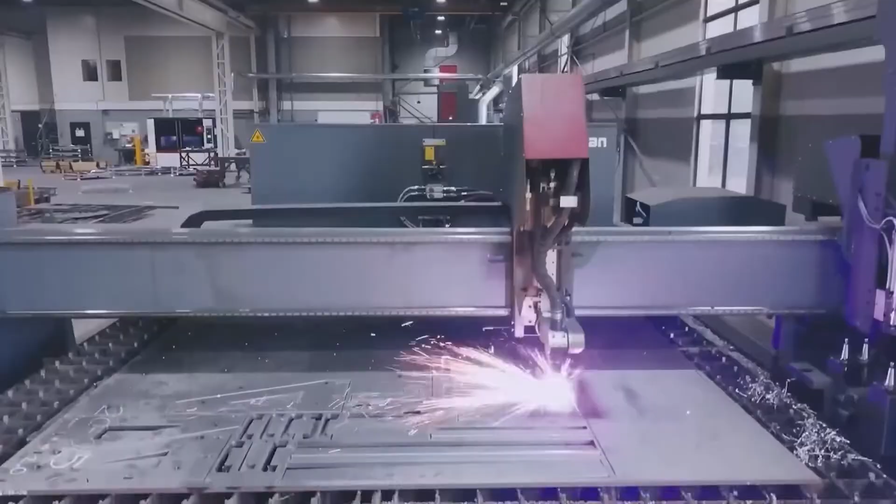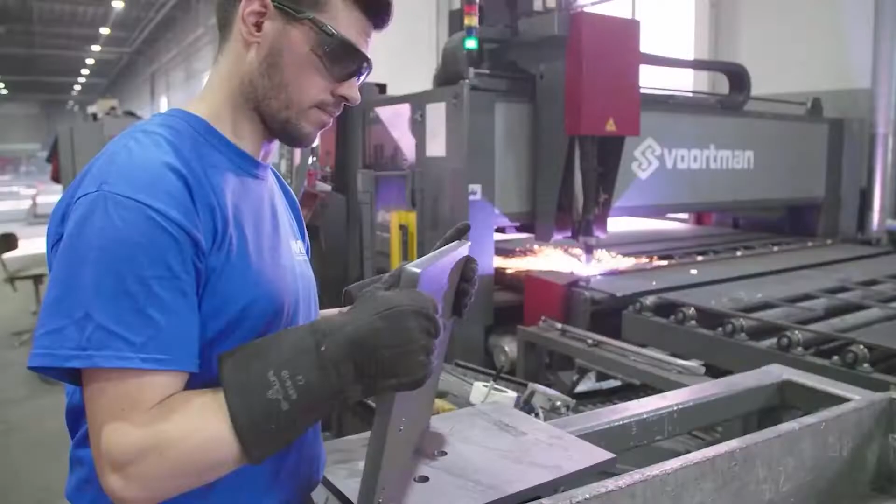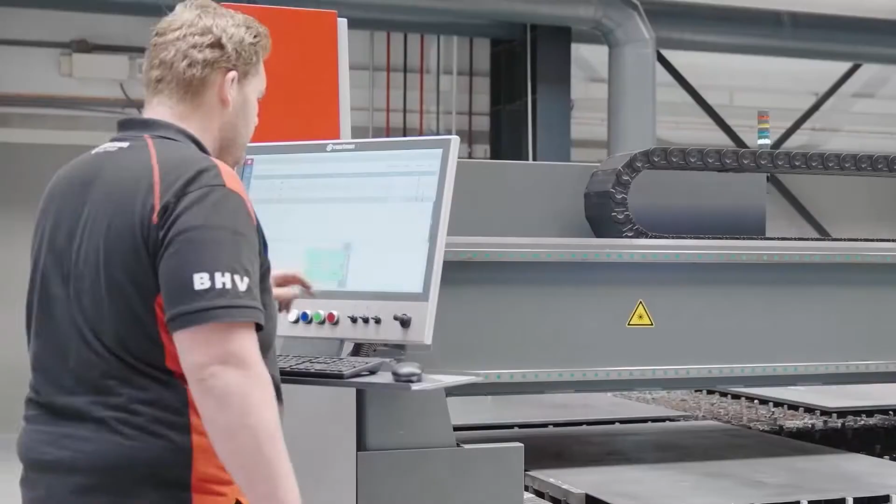Joey, can you shortly introduce Voortman? Olga, thanks for the introduction. Yes, I can. So you already explained we produce beam processing systems and plate processing systems. We are a manufacturer of steel processing systems in general. We focus today on thermal cutting, and with thermal cutting we cut angles, but also H-beams, but also plates and tubes as well. And we do that for a variety of industries. So we supply to steel fabrication, which we see in the video, but we also supply to steel service centers, general manufacturing, pressure vessel manufacturing, windmill manufacturing and even shipbuilding. So quite a wide variety of industries.

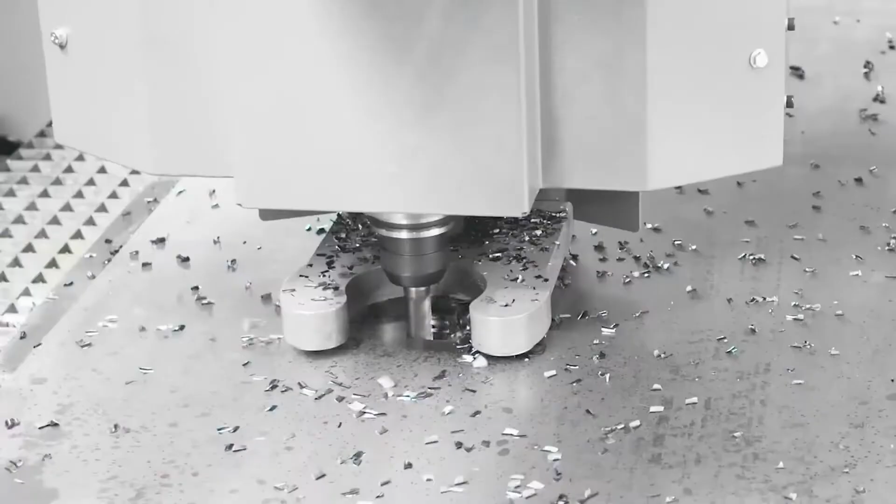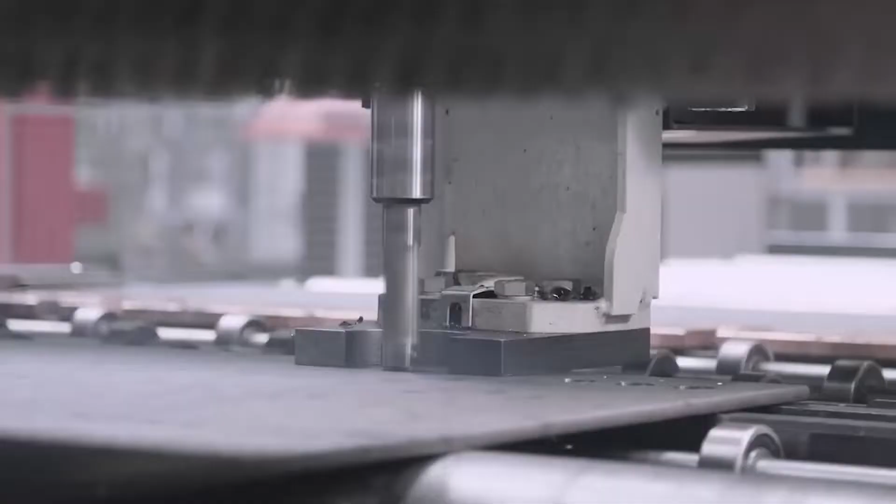We have today, I think, quite an international audience. Yeah. And we are also quite an international organization because we are here in our headquarters, like you mentioned, but we also have subsidiaries in the United States, in Southeast Asia, and in the entire western part of Europe we have various subsidiaries. So quite an international organization with an extensive product portfolio for a variety of markets.

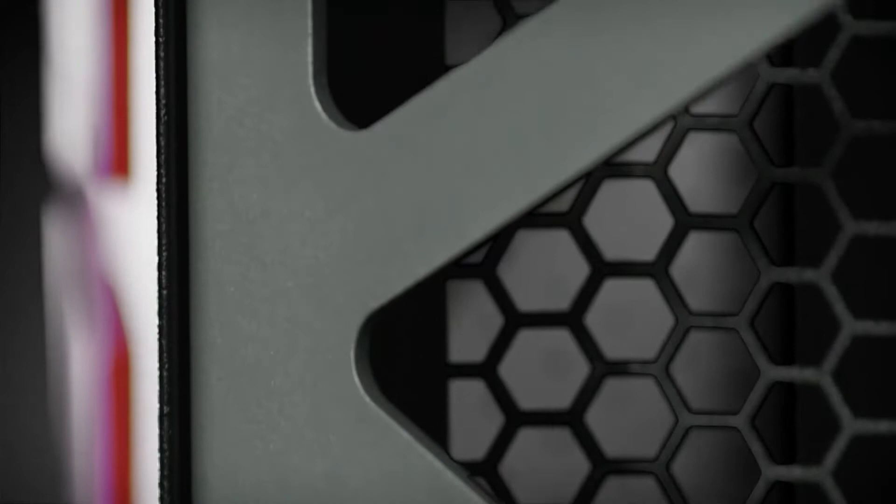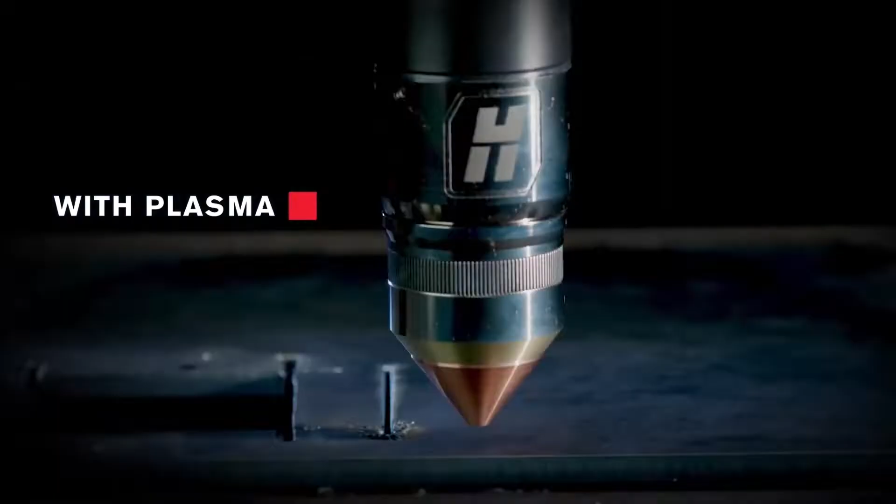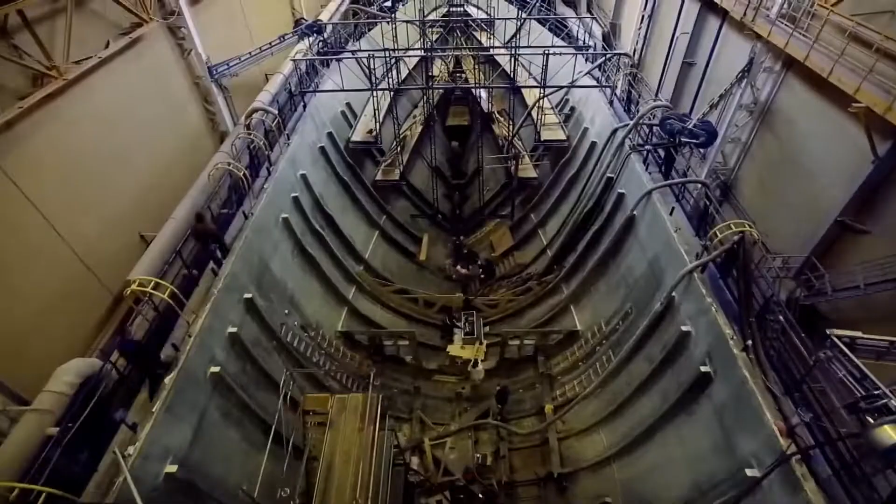And Hypertherm is the other party of this webinar. Can you explain and introduce Hypertherm? Yes, thanks a lot. I'm very appreciated to be here and part of this webinar. Hypertherm, manufacturer in cutting solutions in different segments like steel manufacturers, metal service and job shops, agriculture and stuff like that. We develop machines for high industrial like our new XPR and HPR, for light industrial like our PowerMax and also water jet and all the related equipment around that. Our headquarters is in the USA, in New Hampshire, it's nearby Boston, and for sure all the located business units, facilities around the world.

Okay. Thank you, Timo. So now that we've introduced ourselves to you, we are also curious about you as a participant of this webinar. For example, what industry are you in? A poll appears on your screen right now. Can you let us know in which industry you're in? Are you, for example, a steel processor, or are you a machinery equipment manufacturer, or a steel fabricator? Please select your answer.

So, back to the topic of this webinar, plasma consumable management. You might already be well underway with your plasma consumable management, but today we're going to present some smart solutions and ways to take it to the next level. An interesting question to ask to you first is, do you think you're changing your consumables at the right time? Again, a poll appears on your screen. So, do you think you're changing your consumables at the right time? Then choose yes, or that's what I aim for, I hope so, or you don't know. We come back to the answers later on in this webinar.

So the Voortman plate processing machines and robotic cutting machines are equipped with a Hypertherm plasma source. One cannot function without the other, and both complement each other very well in terms of solutions and nice features. And to show you this, we run a real cutting demo today. Joey is standing at the Voortman V310 plate drilling and cutting machine and is ready to show you some nice features. Let's take a look where and how to start.

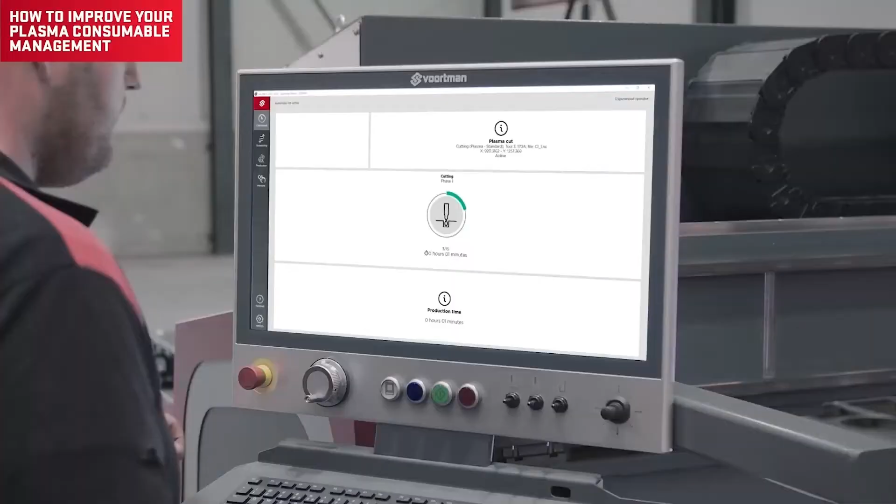Works Preparation has prepared some nests and scheduled them for a certain day. The operator comes in and sees at the machine what kind of nestings had to be run that specific day. He selects those nestings for that specific day and takes them into production.

What's important is that VACAM allows multiple nestings to be added to the production list and run fully automatic, as long as no manual tool changes are required in between. So the operator needs to optimize the sequence so those manual tool changes are not required in between.

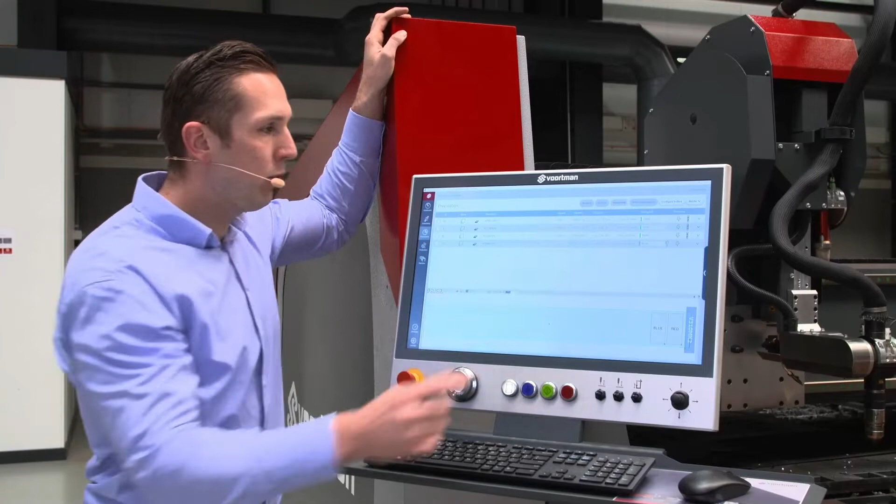For this, we offer the sequencing function. The operator activates it, and it informs the operator about the tool overlap between nestings. For instance, if we select nesting 1, we see that the torch overlaps with several other nestings, so we can select those as well, and then they will be run fully automatic without in-between changes.

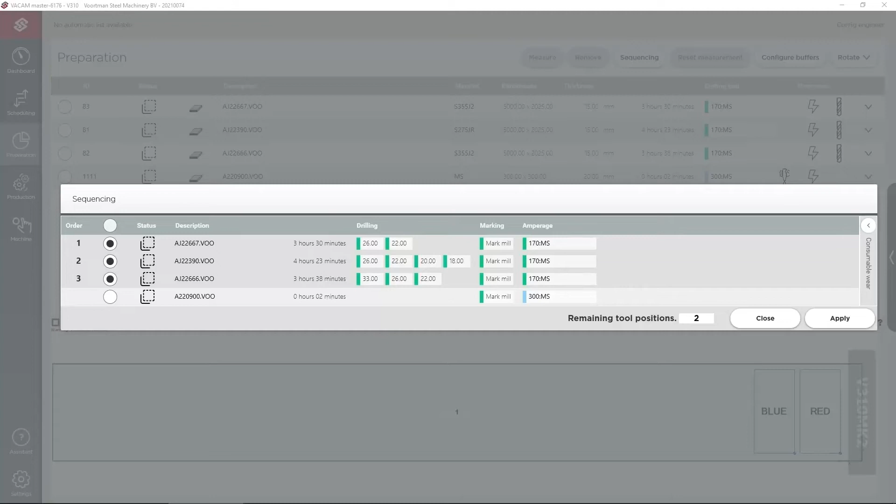What's important is that not only the torch power is relevant for a torch change, it is also consumable wear. For this, the sequencing function also offers information about consumable life and when it is exceeded somewhere in the production list. For instance, if we only select job 1, we don't exceed consumable life, so no consumable changes are required for that specific job.

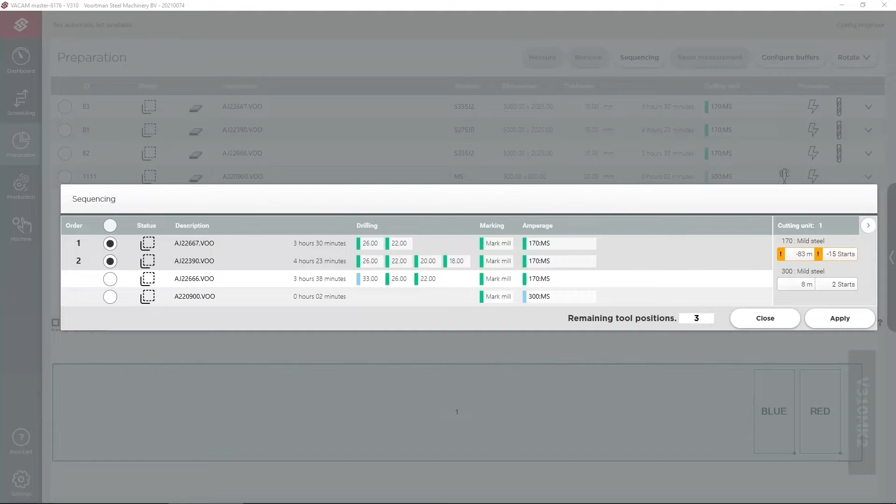If we select job 2 as well, we see that the consumable life is exceeded with job 2. So now we apply the new sequence and we can start production. The sequence is now optimized for automatic production, and the operator is informed when a consumable change is needed, so that production quality is maintained.

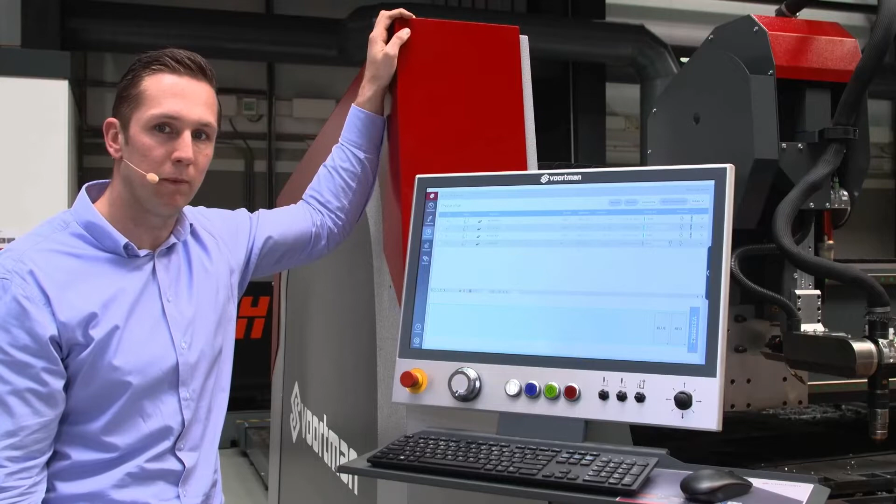So some interesting interactive features. I think a related topic we spoke about this morning, Steph, is about cutting different thicknesses and requiring different torches. Yeah, that's true.

You need different torches to cut different thicknesses of sheets. For thicker sheets you want to use higher amperages, and for thinner sheets you want to use lower amperages. But you have a lot of different consumables, like an electrode, a nozzle, a swirl ring, and you need to use the right consumables with the right amperage to cut a sheet. A work preparator needs to make sure he chooses the right amperage when creating a nesting, because you want to cut at the right speed but also achieve the right quality.

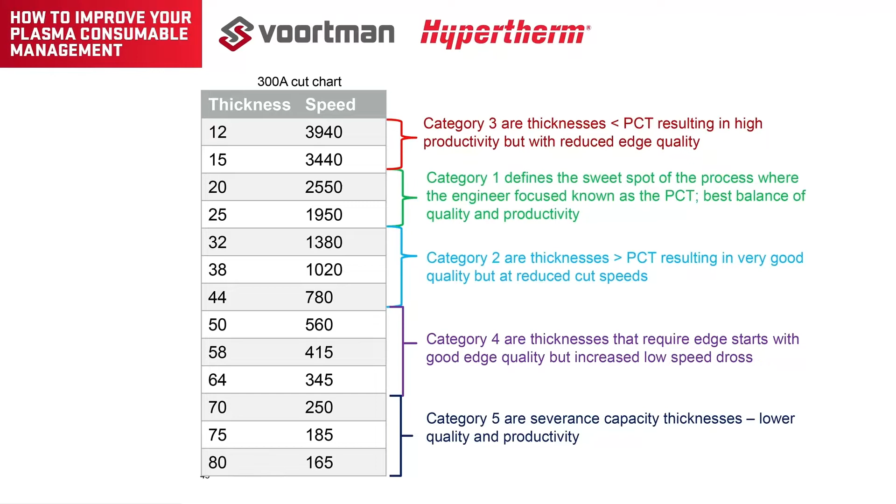Yeah, and I think the Hypertherm quality levels also fit in nicely. Yes, on our HPR we recommend a sweet spot. The sweet spot is even in the middle of the cut charts on each cutting process. For example, when you select 130M, the cut chart shows a range between 3 mm up to 38 mm. The sweet spot for 130M is between 8 and 12 mm. This is the optimal cutting range for the best quality.

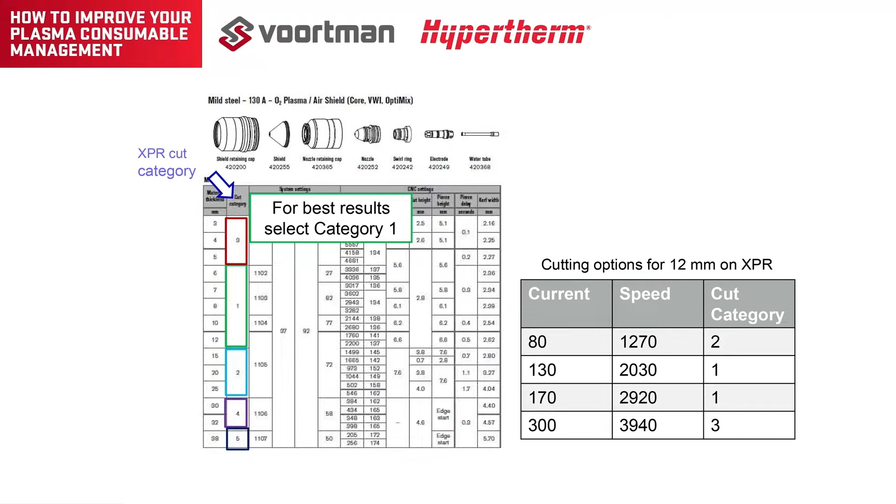On our XPR technology, we give the customer the opportunity to select the right process for the best profitability. That means we select it in different ranges, for example, as you can see in the picture, 1 to 5. So the customer can choose by himself which cutting process they want to prefer. So you give way more guiding lines for the customer depending on what they want to achieve.

Exactly. That's what we figured out during our visits, that we would like to give the customer the opportunity to choose the best profitability they can achieve. For example, a couple of customers don't care about quality, and a couple of customers want good quality. We also face end users who say, I would like to cut as fast as possible. So they also have the opportunity to change between those specific ranges. Our recommendation from Hypertherm is still range 1, because this is the correct speed regarding the correct thickness and the best outcome you can achieve.

Yeah, clear story, Timo.

The consumable proposal is also something related to that, isn't it, Steph? Yeah, indeed. So we use those cutting qualities and the quality levels and the cutting chart in SigmaNEST.

We use Sigma Nest to create nestings for our machines, and we help the work preparator. So when he selects a sheet thickness, Sigma Nest will calculate the amperage needed to achieve a good quality and a good speed. As Timo said, he can also choose to cut faster or slower, but we want to help him make the choice.

And in the end, Sigma Nest makes the nesting, and the nesting is used on the machine. So VACAM knows which amperage has been selected by the work preparator, and VACAM will inform the operator which torch needs to be mounted with which consumables, to make sure they make the right choice and prevent mistakes. Okay, so you complement each other very well and ease the operator.

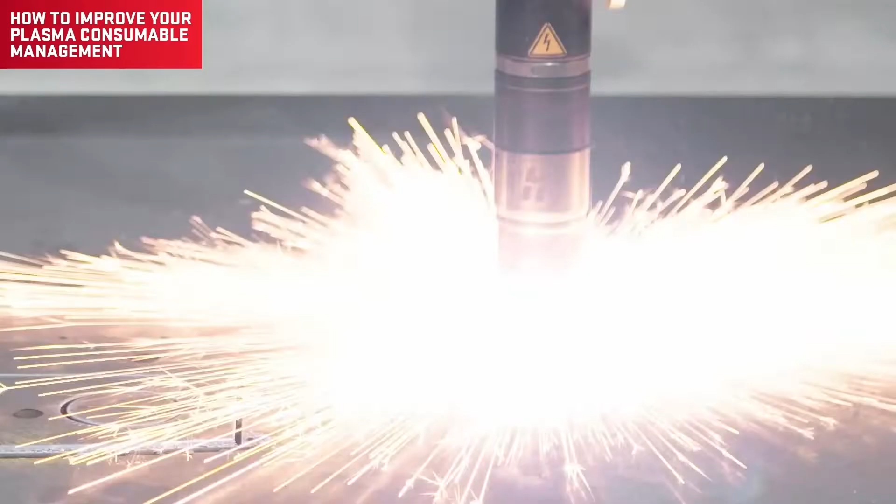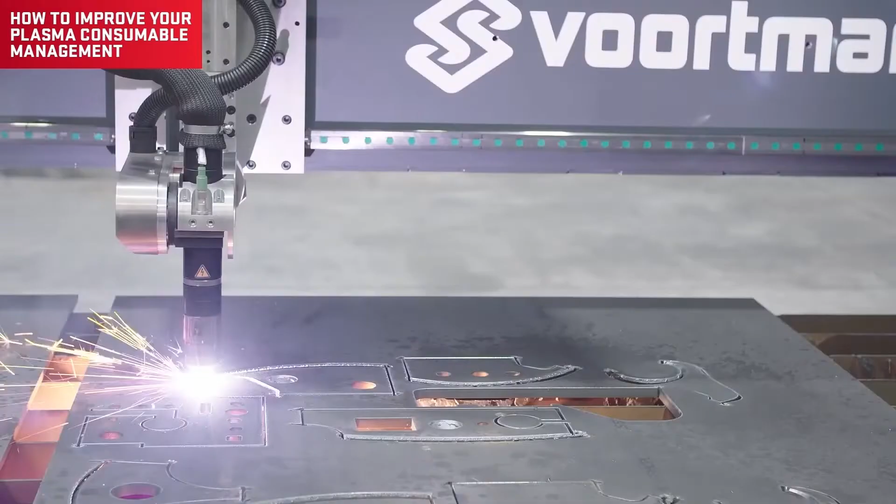What's important is that before we start cutting, we always do an initial height sense. We do that to define the top surface of the plate, because we want to maintain a height between the nozzle and the plate. So we measure first, then move to a piercing point, which we can see in the video. Then we start cutting, and then we measure the arc voltage, which is the arc length -- the length between the electrode and the plate.

What happens now is during the consumable life, as you move towards the end of life, the electrode wears down and the arc becomes longer because the electrode becomes shorter, at least in the middle. Now when the arc becomes longer, the torch will normally move down towards the sheet. But for the cutting quality, it's important that the nozzle remains at the same height from the sheet at the start of the consumable life as at the end.

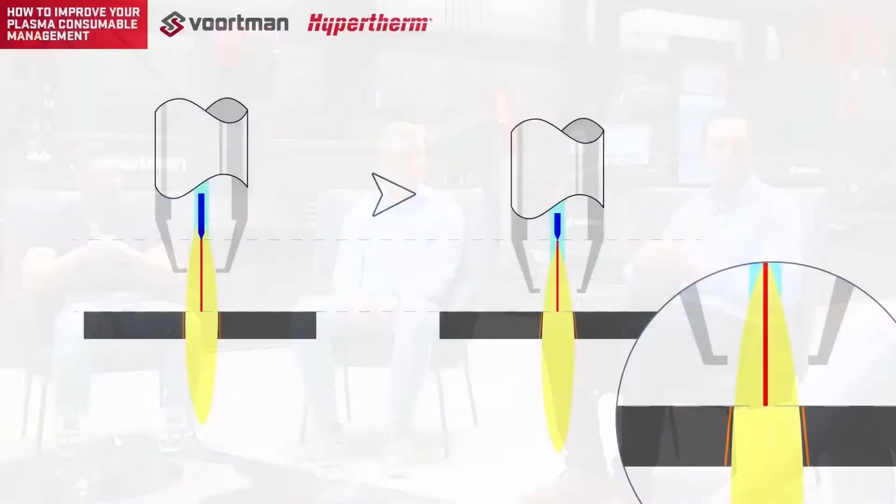So what we do is touch the sheet, then start off cutting, and then measure the actual arc voltage. We correct for that consumable wear, and we do that at the point where the arc is stable, of course. So to enable that, a stable arc is very important.

Yes, and I think Hypertherm is also focusing on that. I guess the arc stability is a great improvement on our XPR technology, because this technology improved the steadiness, specifically on the pierce and also the lead-in, because you get a sharper arc before you start cut. This is the main improvement because you avoid less waste material and can also reduce a lot of operational cost. Yeah, and with shorter lead-ins you get better nesting and reduced waste.

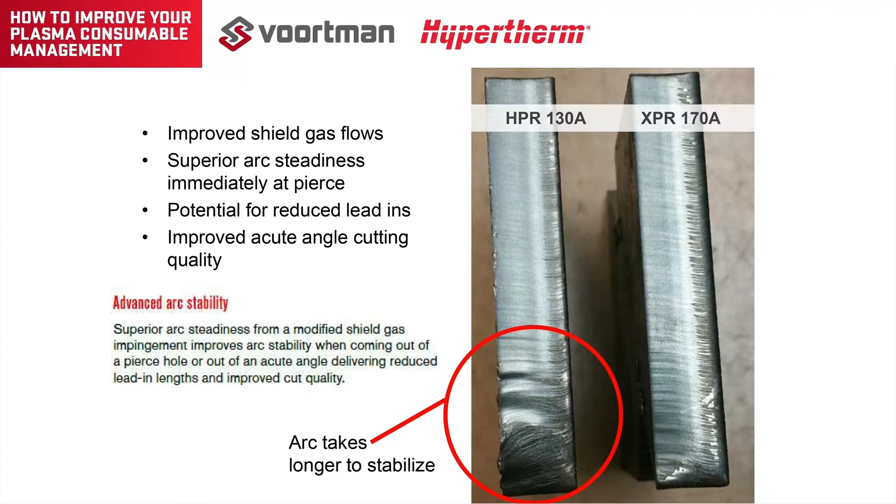Exactly. So what you saw in that picture is that on the left side you have the HPR, and you see all the quality issues in the beginning of the cut, right? And for our XPR you get a sharper arc, and the steadiness of the arc is much tighter at the beginning of the cut. This is the big improvement on our XPR. So even with the shorter lead-in, you don't see that rippling effect. Exactly, yeah.

Okay, great improvements where quality for our end user is top priority. But I think it's time for some action now. Steph, talk me through, what do we see here?

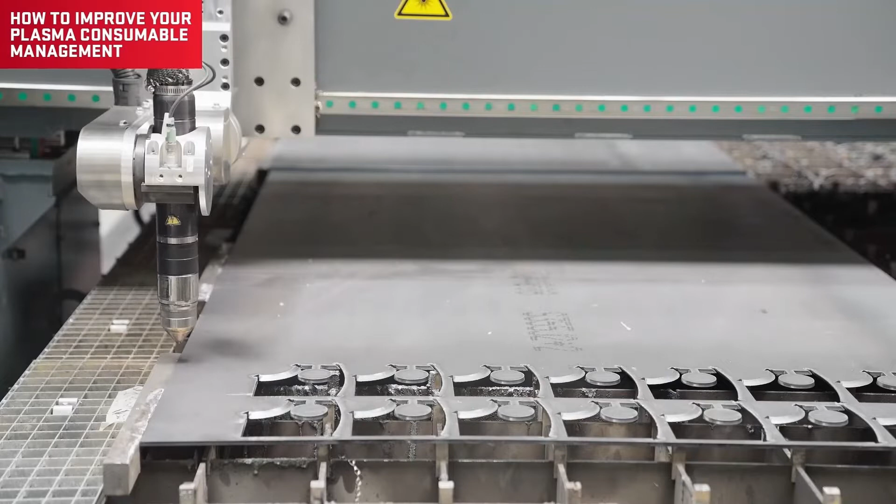Okay, yeah, we will see the Voortman V310 cutting a plate, and what it's doing right now is performing a scrap cut. A lot of our customers are doing scrap cutting to make handling of the material and the waste material a lot better.

So what happens with scrap cutting is that the torch will reach the end of the plate, and in a lot of cases it will even overrun the plate. So what we see right now is that the torch is overrunning the plate, but luckily it stops cutting immediately. That prevents the torch and consumables from being damaged. And that's important because when they're damaged, you have a lot of cost to replace them, and of course machine downtime because you need to replace the torch.

So Hypertherm introduced the arc ramp down protection, and we use it to make sure the maximum output of the machine is possible. So automatic ramp down protection. Exactly, thanks for that. And this is what we would like to help the customer with, to reduce the cost and help extend the consumable life.

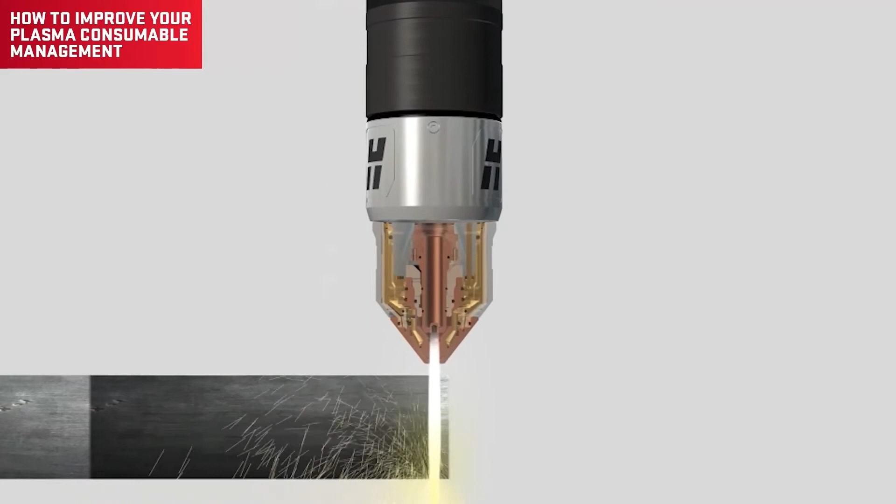And specifically with what you can see in this video is the arc is going to stretch until it breaks up, and the consumable life goes down much, much faster.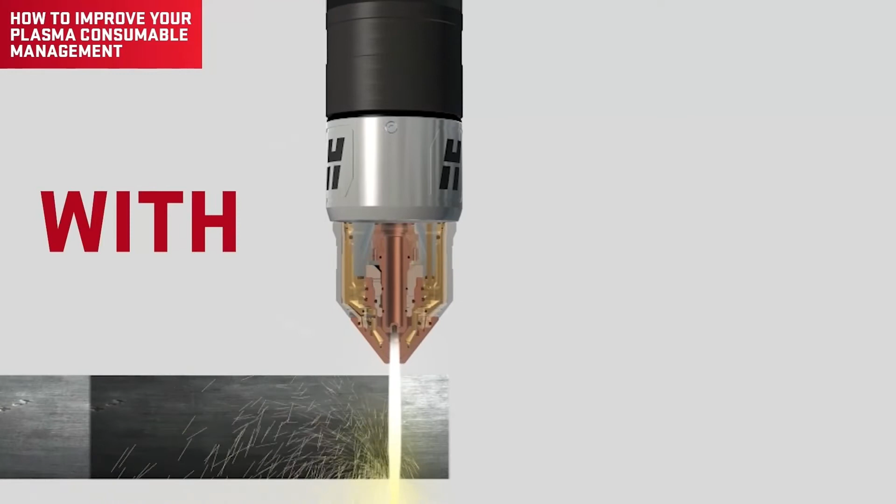And with our protection, the chopper module senses when the cut is about to end in an uncontrolled manner, and automatically initiates a ramp down sequence for protecting the electrode. The benefit is to protect the electrode, dramatically extending it up to 3 times.

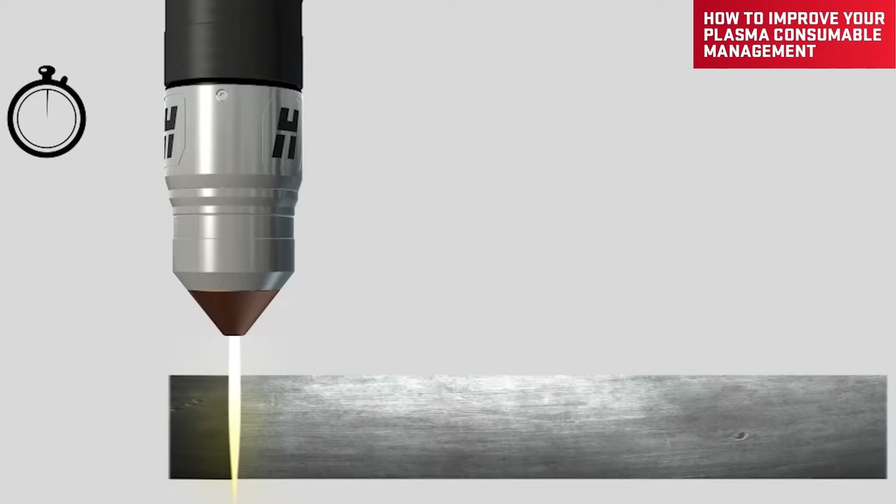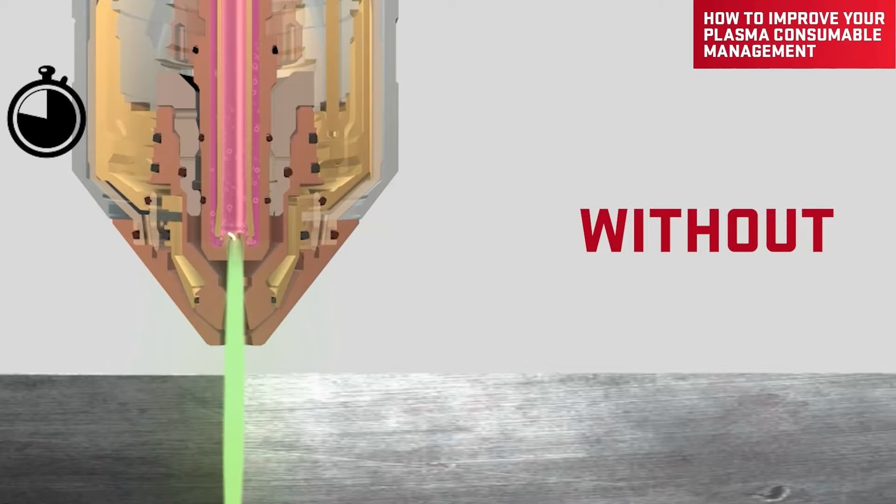Yes, for the torch protection itself, what you can see in this video, I think this is what you figure out a lot of time in front of the customer, right? You can see the hafnium pit here is going to blow out uncontrolled, which can damage the torch at the high current level. And this is what you see in a few seconds. You see that the arc is going up, is stretching, and then the electrode blows up.

But with our automatic torch protection, we try to reduce the impact of catastrophic electrode blowout, which can damage the torch at the high current level. The chopper would sense, in this specific case, the onset of the catastrophic electrode blowout and shut down the system, protecting the torch from potential damage and potentially enabling improved consumable utilization.

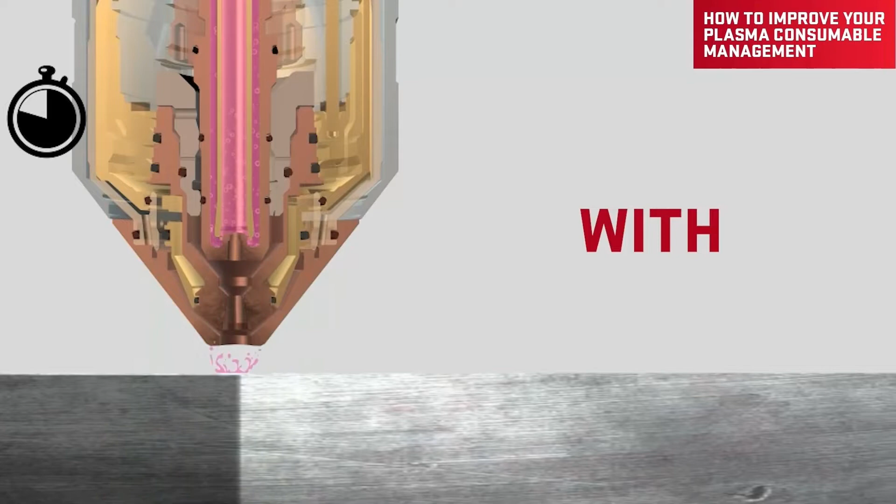And this is, I guess, a very great improvement as well. And here we talk really about the real end of life of the electrode. Yes, this is what we would like to avoid.

In a specific amperage range, in the higher amperage range, you would like to avoid that the total torch blows up, right? And the torch is quite expensive, and this is what you can see very, very often. They try to cut until the end of the electrode life, and then exactly this happens: the hafnium pit depth goes up, it doesn't exist anymore, water comes down and the torch blows up. So this is what we would like to avoid, specifically with our new technology.

Yeah, and as an end user, as I understand correctly, you don't want to reach that end point of end of life, right? And maybe it's a good moment to look at the poll results we did at the beginning.

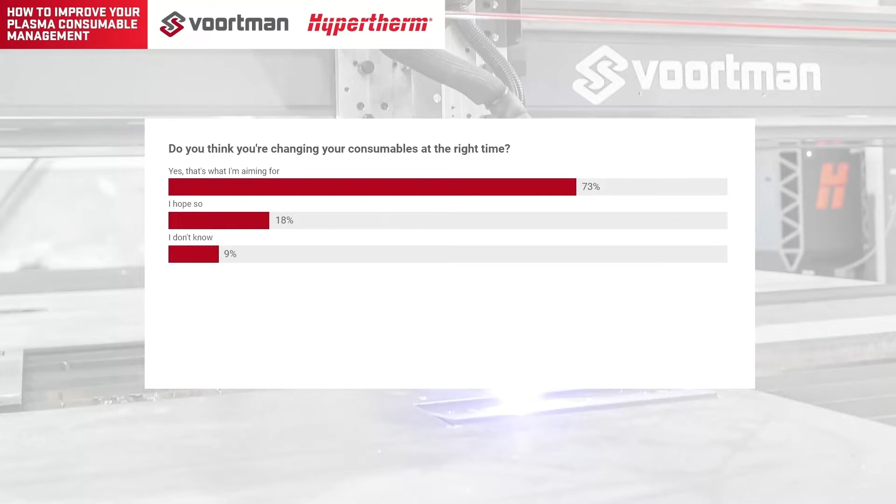We asked you, do you think you're changing your consumables at the right time? And I see that most of you answered yes, that's what I aim for. Some of you hope to do it, and some of you just don't know. But guys, most of them think they are changing the consumables at the right time. But is that also something we see in practice?

Specifically, the operators do not do something wrong, right? Because they do it because there are habits they have during the day and they try to make it as best as possible.

But during the 7 years I've worked for Hypertherm, I enter end users all the time and look in the used consumable box, because the used consumable box is the open book to see how the machine is running and how they use consumables. And I think this is a great indicator to start the discussion, right, on what you can improve. For example, I pick up a lot of electrodes and see whether they are used completely, used correctly, or used not correctly, and then we start a discussion, right?

And also when you look at the nozzle, for example, the nozzle is an open book on how the machine is working. Also, the ratio between swirl rings and electrodes is, for example, 1:1. I think this is quite nice to start the discussion on how to improve consumable utilization in the end, to reduce a lot of costs as well. And I would not say that operators are doing a lot of things wrong, that's for sure not, but we can definitely improve a lot of things to make it easier and also reduce operational costs. I think, Timo, we have similar results at our customers.

So I think a nice story is that even at our own production site, you see that operators quite often change consumables before they start a job, or they change it after a job when it's perhaps too late and you can scrap your parts.

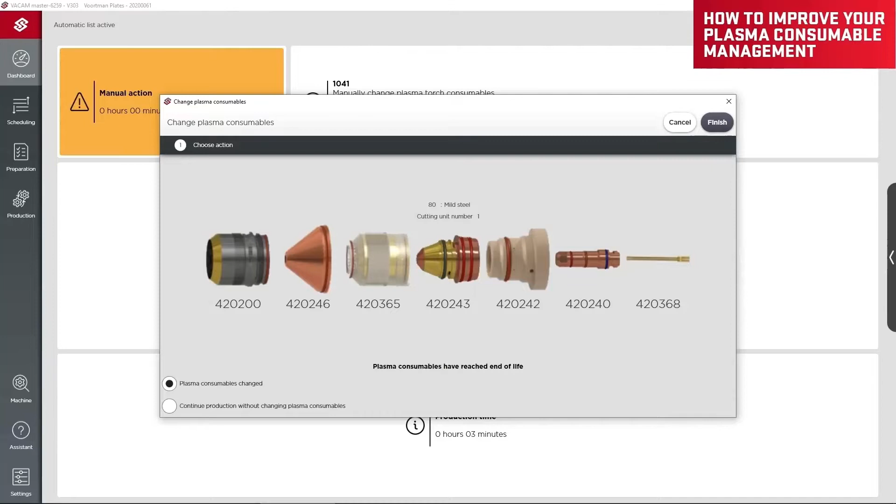He can do other errands and things somewhere else in production, but when he nears the moment of change, he gets that information from the machine.

So he knows when to be there, and then he can use that information, okay, I have to change them now. Exactly, and this is fantastic, and this is even what I would like to train operators on, when exactly to change the consumables. So you can calculate your cutting behind the meters, right? I have to cut so many meters and then change consumables. Or I have a lot of pierces, because it's also different if I just cut meters or if I have to cut a lot of holes. And this also affects the quality of the consumables in the end.

So you can very easily look in the software, okay, now I have, let's say, 1000 starts, for example, and then I have to change. Or just to make sure that after the 1000 I do a quick check if the consumables are in good condition. This is a nice indicator to help with that.

Yeah, and we allow for that flexibility. So you can change starts, meters, those variables based on what the job needs or what the customer thinks is the bottom line of quality. You can change those parameters, and the machine just turns it into a time. That's what the software is doing. It takes those parameters the operator filled in, or what they define at the company, and changes it into a time. Then you have to be there around roughly that time to see if the consumables are still good.

In the end, it's a decision of the end user, right? When you change something, you also have to understand how they cut and what the priority is for them.

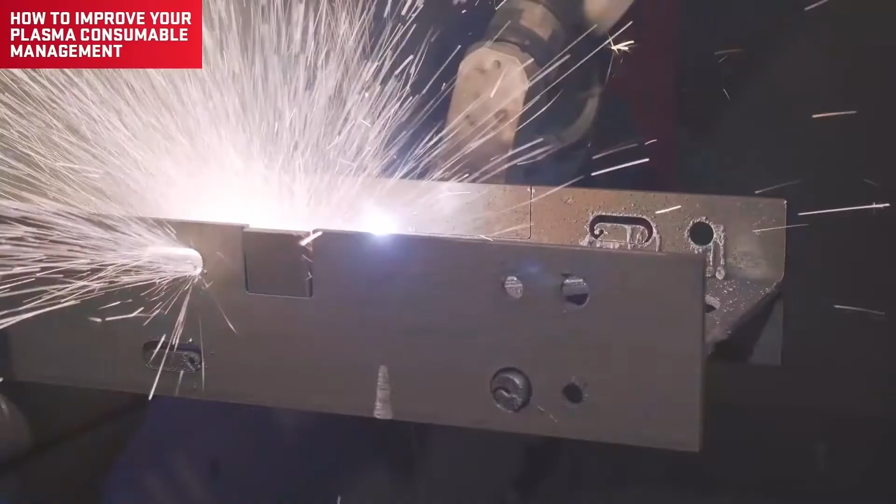So I'm here at the Voortman V807. This is the machine you just saw in the video. The 807 is one of the machines which is capable of processing multi-thickness products. Over here we have an example of a multi-thickness product. A profile of course has a web and a flange, but those are not always from the same thicknesses. But there are holes in as well the flanges as the web.

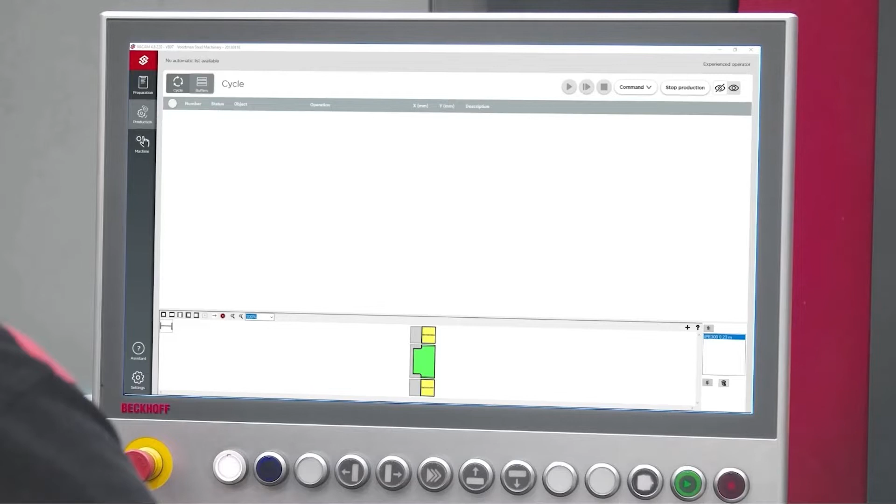We use Hypertherm True Hole technology to determine which torch can be used best to cut those holes with the best quality. It could be that several torches can be used to meet the True Hole technology, and then we will look to the other cuts in the beam. We will select the best torch for all the operations, and VACAM will calculate within a second what is the best torch and inform it to the operator. So it's much more easy for the operator to select the right torch because the machine will inform him.

Summarized, the machine will look to the holes and make sure that the best quality is achieved. Then it will look to the other cuts in the profile. The operator will be informed and you will have the best quality of cuts in your product.

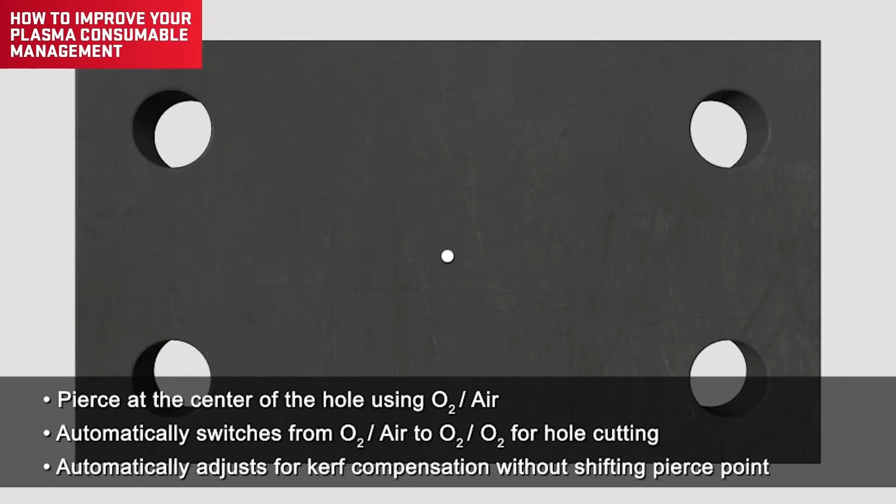So Steph was referring to XPR True Hole. Can you explain a bit more about that? Yes, when I discussed with customers about True Hole, they even got the expectation or the feedback, this doesn't look like a perfect hole, right? You can see in the video the technology behind the True Hole itself.

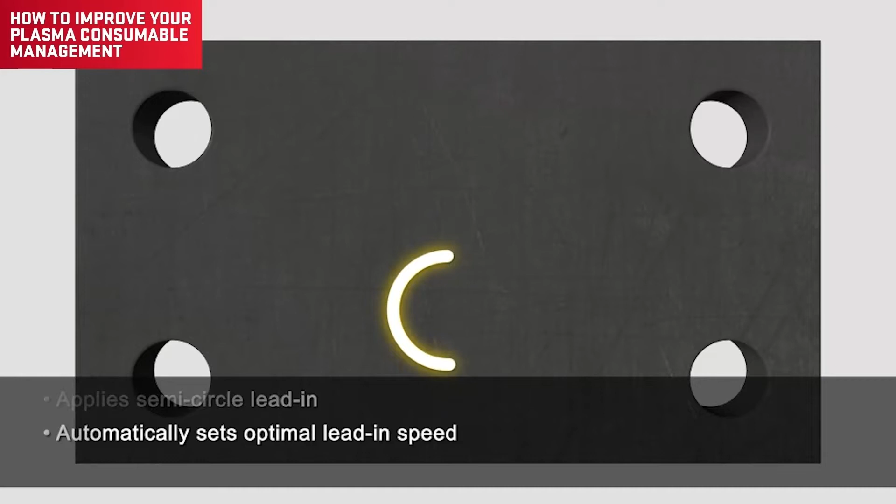But when we are talking about a perfect cutting hole, we have to understand which process and which quality we want to get. The perfect hole will be equal in the circular dimension throughout the entire body of the hole. So the expectation to get the perfect hole are quite different from customer to customer, specifically on plasma.

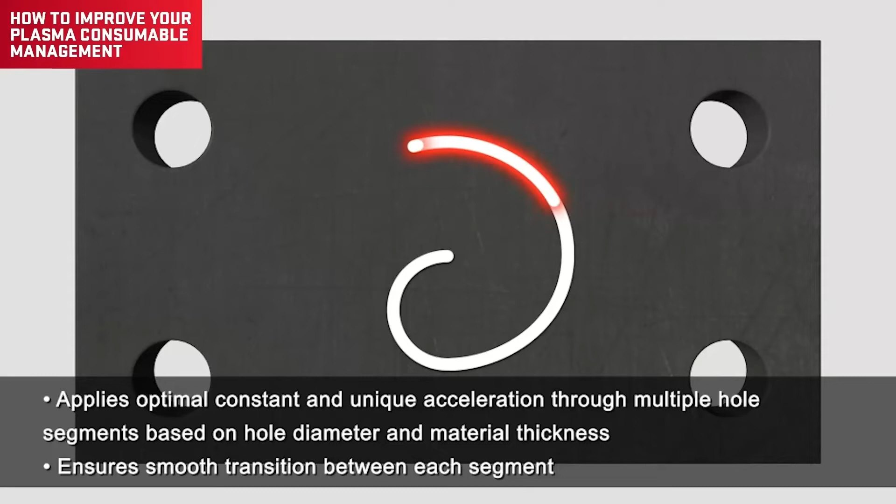But what is important specifically on True Hole instead of without is the reliability. When you cut 100 holes, a simple bolt has to go through the material after the last cut as well. And I think this is an important thing that customer has to understand, right? The reliability that a simple bolt has to go through during the whole process.

Reliability, I think, allows for automation, because if you have a stable process, then you can automate it. Exactly. And predict also when the end of life is what you still allow.

Yes. And when your customer would like to have a good feeling on the cutting process, not even on the consumables, also from the cutting process itself, you have to make sure that the process works, right? And I think True Hole is a great solution for that. I really recommend to use True Hole for cutting.

Yeah, we spoke about all kinds of different technologies and software features in the field of plasma cutting. But do you also have some hands-on tips and tricks the audience can already implement today or start with today? Yes, we also have different solutions.

So I see some interesting questions came in. The first question: what kind of other features do you have to extend unmanned production?

Yeah, we have a couple. For example, we have the sequencing, the scheduling and the buffering for the plates to enable unmanned cutting on the machine. But we also have a feature called unmanned mode, which makes sure the machine only performs operations that can be done without interference of an operator. So if you want to pre-drill a lot of holes before cutting the next day, you can do that overnight, and select unmanned mode to make sure the operator doesn't have to be at the machine. And you need a lot of tools for that.

It could be if you need several diameters or something, so you can add an auxiliary tool changer. It's also over here at the V310 - it's a tool changer in the front or at the end of your cutting table, and it will give you more positions for your tools. So then you can run unmanned for a longer time.

Okay, thank you. Next question, I think this one is for Hypertherm: what is the Hypertherm recommended consumable change?